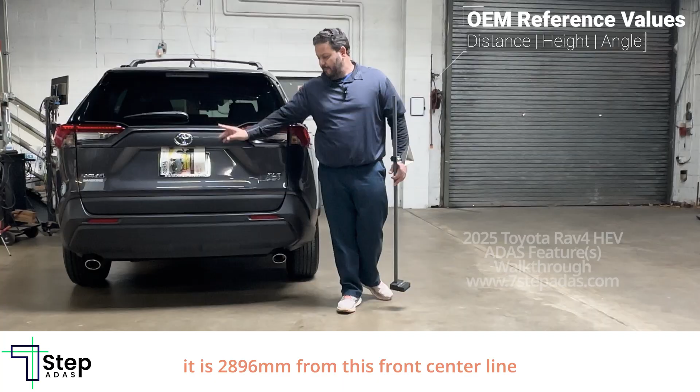Okay, having reviewed the blind spot instructions for this vehicle, they're very similar to another Toyota we just did. This is all fresh in my mind, but it is 2,896 millimeters from this front center line, where I will place this radar target at 863 millimeters in height. The angle that the instructions state is 53.7.

You can print out, I actually have one. You can print out the Toyota sheet like this and use it. It is useful, especially if you're just getting started. This will help you get this done a little bit quicker. We recommend what I'm about to show you. It'll be a lot faster and you don't have to keep using this.

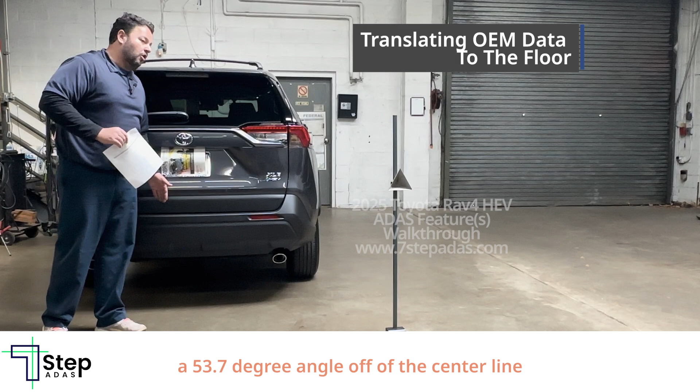What we're going to do is we're going to drop a plumb bob here, create our center line. Once we have our center line and our plumb bob, we're going to make a 53.7 degree angle off of the center line and then measure out 2,896 millimeters to place our radar target at 863 millimeters in height.

I know it's a lot. I recite it from memory because I've been doing this for so long. I'm going to show you why it's not hard. You just have to pay attention.

Okay, this is nothing really new. You guys have seen me make center lines before. Here we are, centered with the emblem. And hold on, let me make sure I showed that correctly. It is centered with the emblem, right? Right. See that? Okay. And now, all we wanted to do here is hit our plumb bob.

Notice the plumb bob is a lot higher. It's actually not touching the floor like we normally would like it to be. And the reason for that is because of the angle I'm about to lay down.

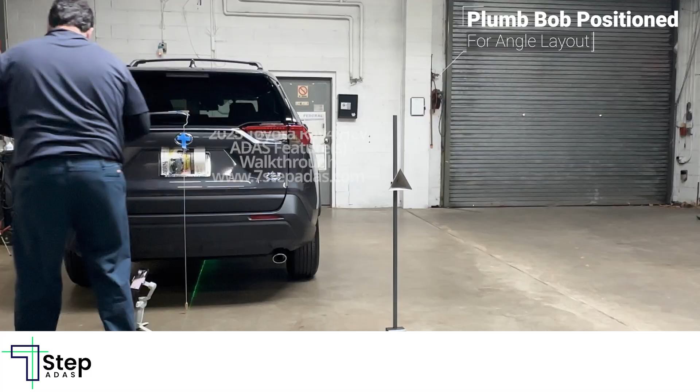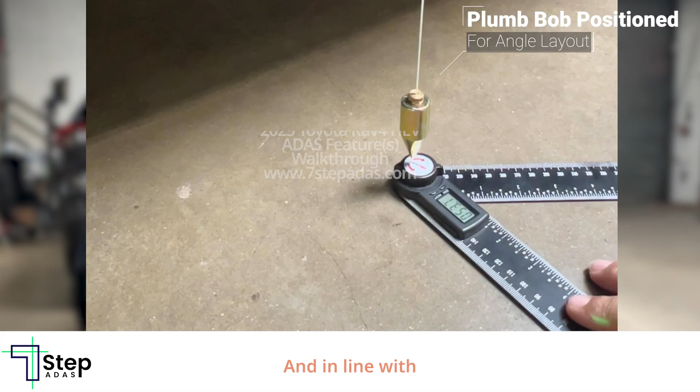Okay, here I have my digital angle ruler. I'm going to set this at 53.7, like so. I then place it under my plumb bob and in line with my front laser line. And the goal is to get it through the rear also center, because now I know that my line is coming directly through and 53.7 degrees is going to be directly out from the center there.

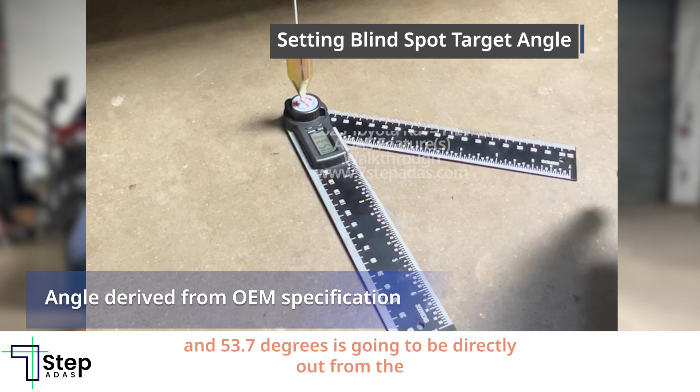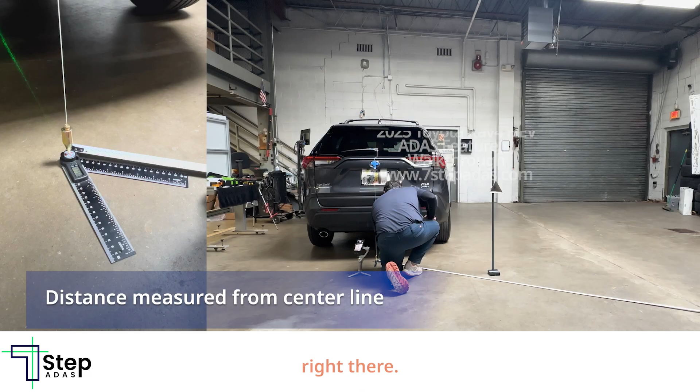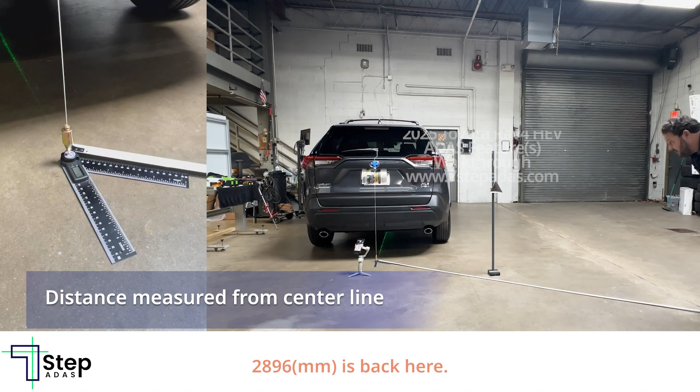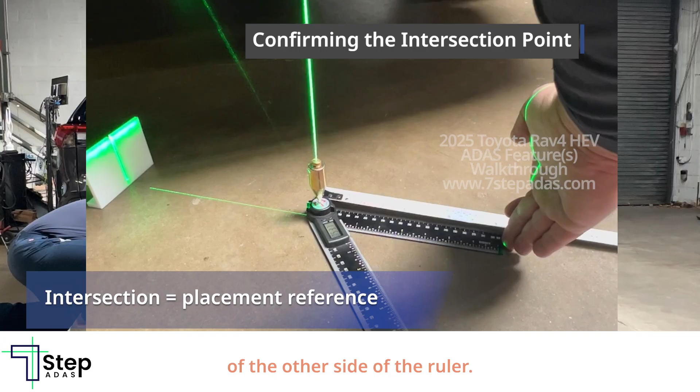Now I grab my tape measure. Okay, I want to be just touching right there. That keeps me in line. And now 2,896 is back here. My goal is to cross through the center of the other side of the ruler for my direct measurement.

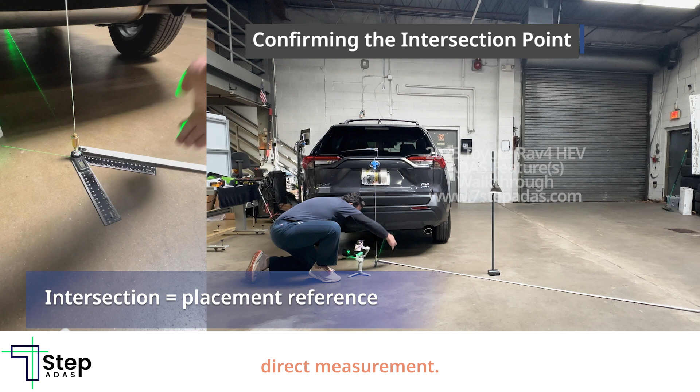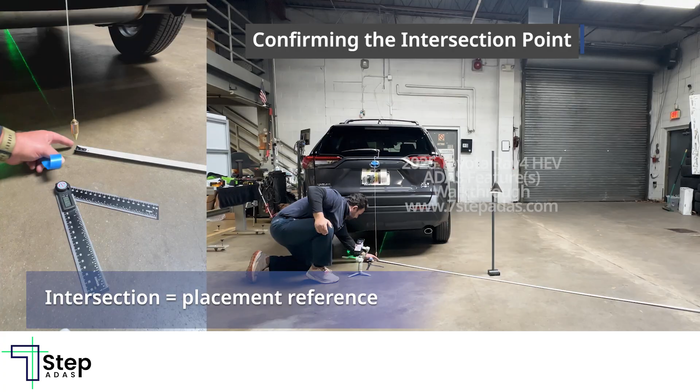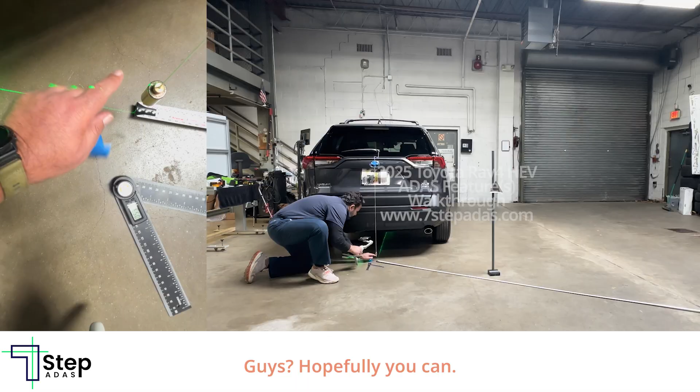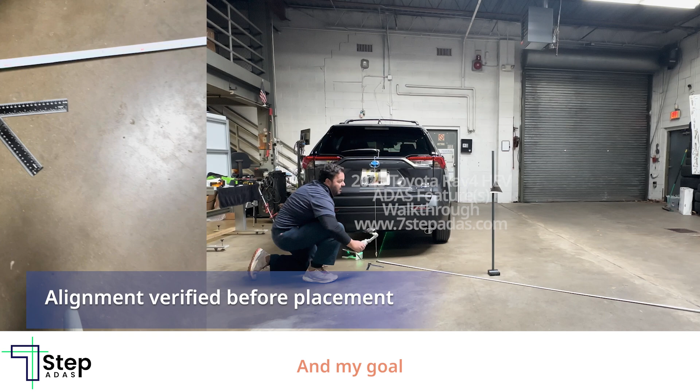Now I can take this out, pull the plumb bob up, put my tape measure where these two intersect, which is right there. See that, guys? Hopefully you can. There we go. I put the center of the tape measure there, and my goal is to have that laser center meet my tape measure.

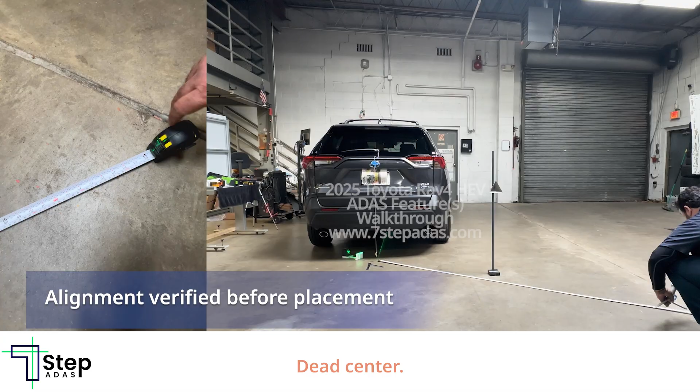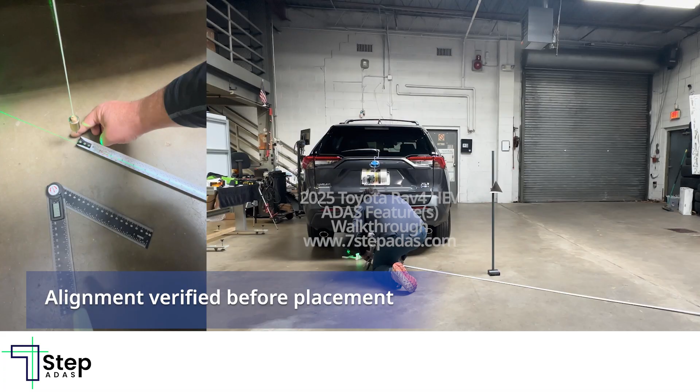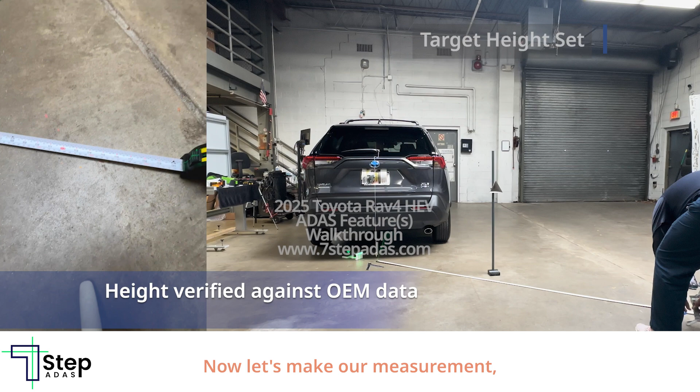I got to move this over and be in line, dead center. See that? And now I come over here and readjust. Happy with that. Dead center. Dead center. Now let's make our measurement 2896.

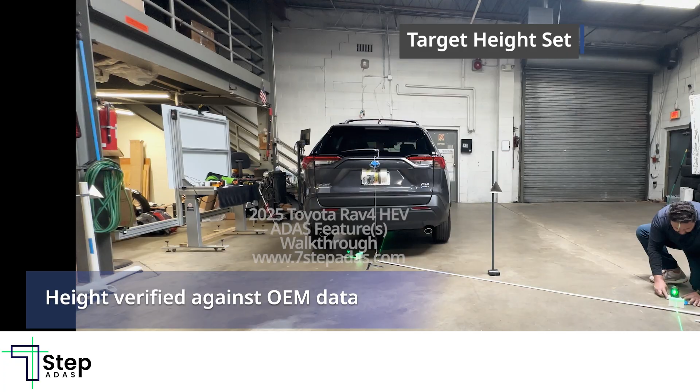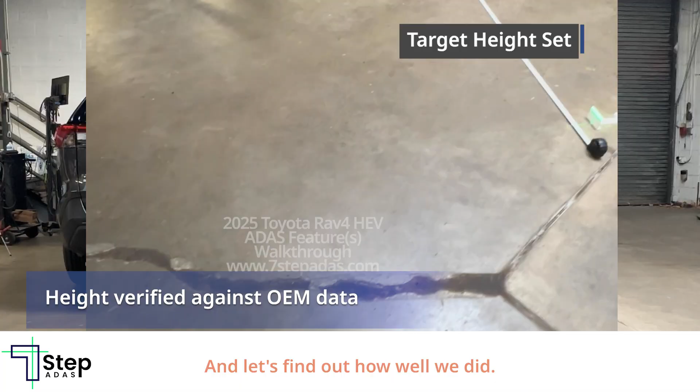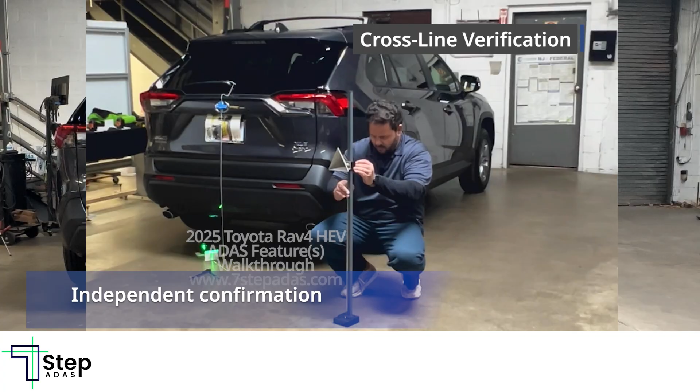I can take my tape measure out and I could drop my target once it's at the right height. And let's find out how well we did. Let's go up to 863. Okay, good with that.

Now to perform my check, I'm going to want to line up everything here the same as I did for the front, with the only difference being I'm now in the rear. But I actually get some really great cross lines that help me keep everything in check. So check it out. First, I have the line coming off center. It comes in. We want to hit that at zero.

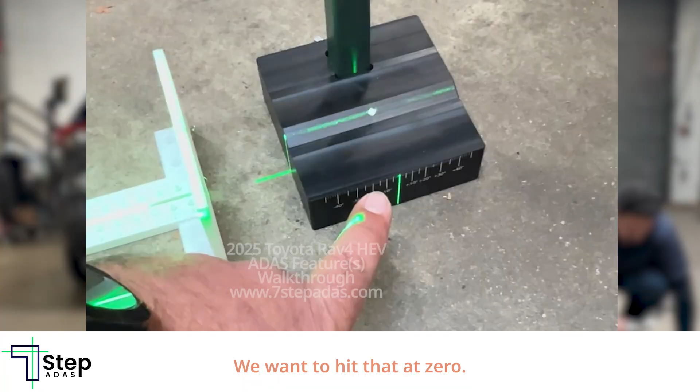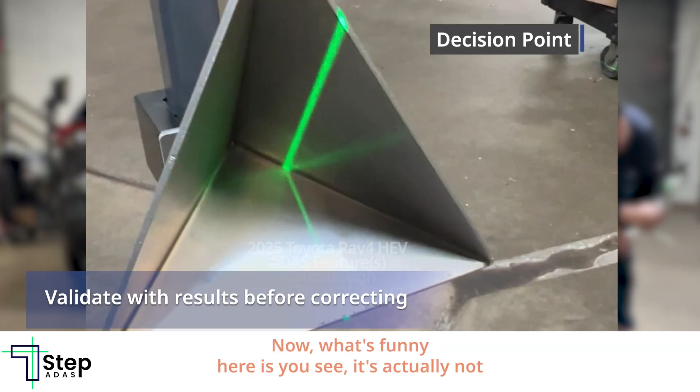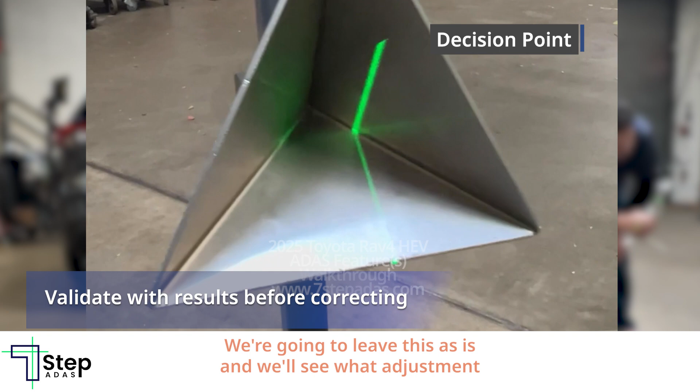And now I have my 2896 line that we want to hit right there, because that tells me this target should be in the right place. Now what's funny here is you see it's actually not. It's off a little tiny bit. I'm not going to mess with this because of that. We're going to leave this as is, and we'll see what adjustment I make afterwards, if any, based on the result.

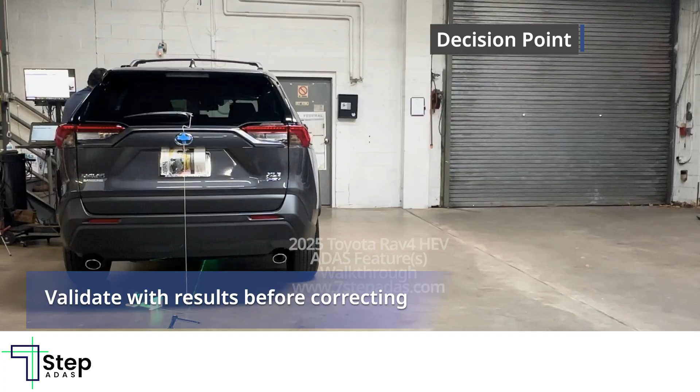And we lost our vehicle interface module. I need to close, leave, and reopen.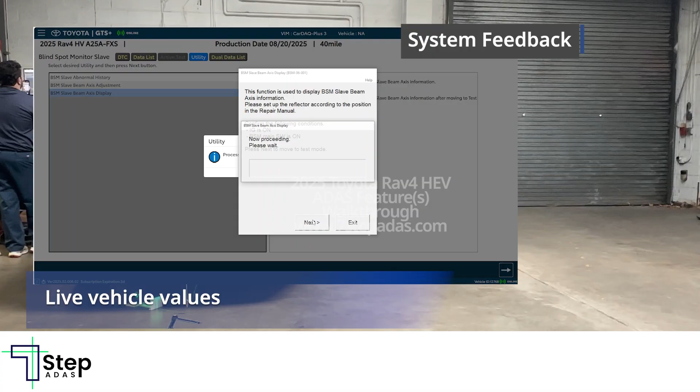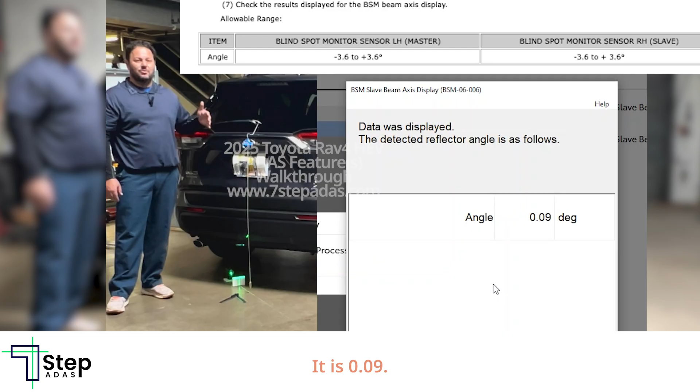All right, there's nothing left to do here. I think everybody got to see what took us probably about 20 minutes. Again, we can time it if we really want to know. This angle is almost 0. It is 0.09. That means that the target placement is incredibly accurate.

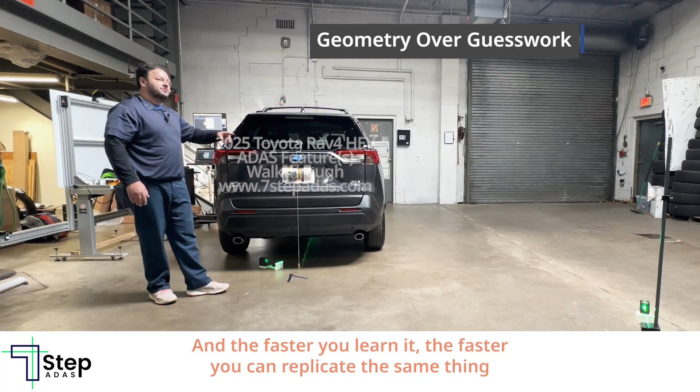And that is all a result of everything you saw me do today. There is no special trick, no magic machine. This is geometry, and the faster you learn it, the faster you can replicate the same thing at your shop using our tools, methods, and ideas.